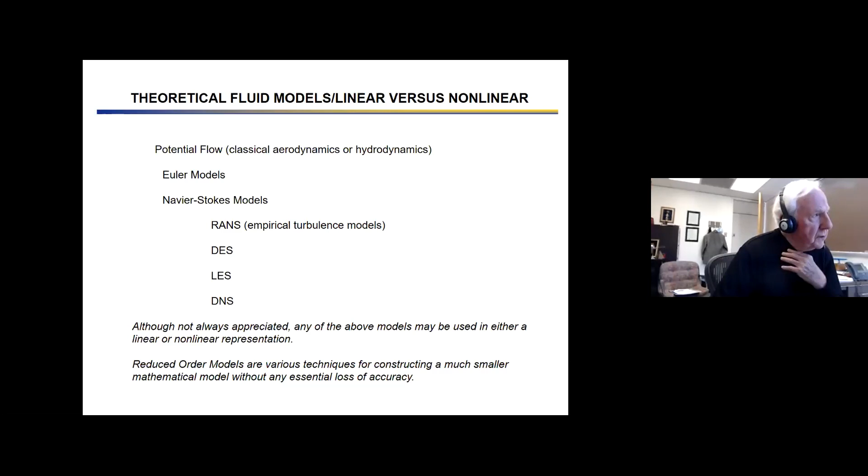As Jack McNamara knows and others here today, there's been a whole raft of people and efforts to construct so-called reduced order models, and that means different things to different people. But in my context, it means we're trying to take very large models of the fluid, large in terms of number of degrees of freedom, and break it down to something much smaller, but without losing any appreciable accuracy. That's easy to say, and hard to do, but some success has been achieved.

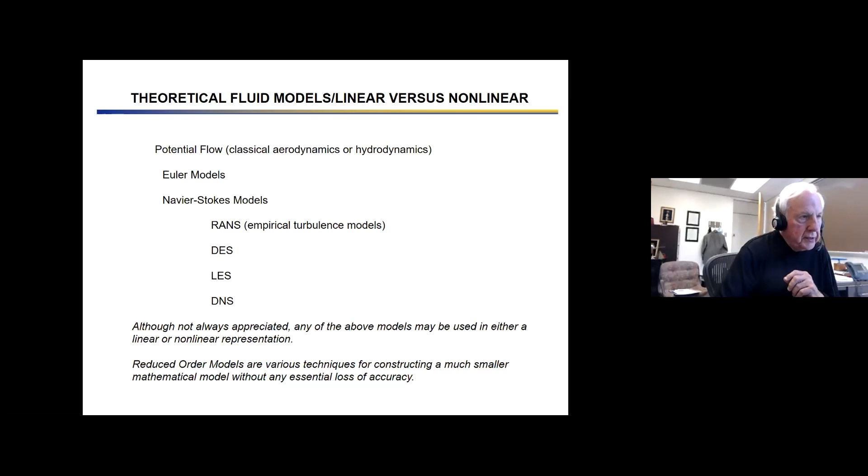With respect to the structural models, we're much further along in terms of constructing reduced order models. We know certainly how to do it for linear models because we simply need to find the eigenmodes. It turns out a modal representation works for structures as well, although I keep having people tell me, gee, can that really work? And the answer is yes, it can.

There are various nonlinearities that have been studied in the context of structures. Free play is something that's very important in practice and it's extensively studied in research as well. There are various geometric nonlinearities, and you can look at beams, plates, shells, and other elements as well, including dry friction dampers. The role of finite element models.

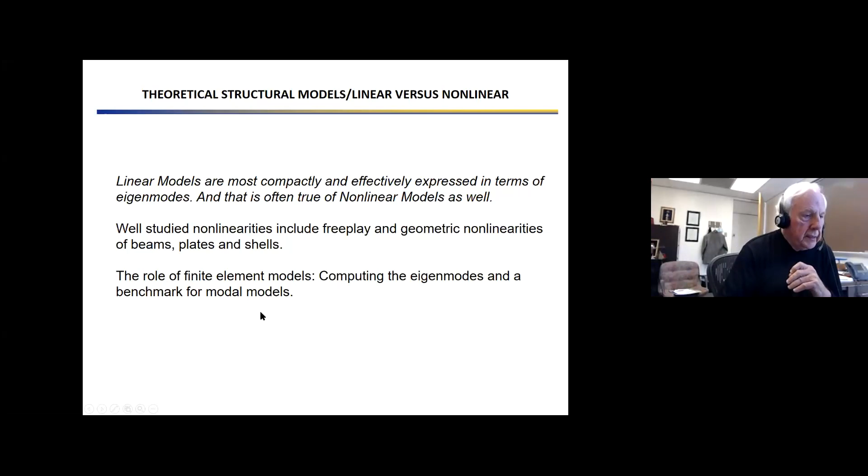This may be mildly controversial, but in our experience, we normally use the finite element models to first find the eigenmodes, and then we use a modal representation when we couple that with some fluid model. It can also serve as a benchmark in terms of assessing how accurately the modal model is.

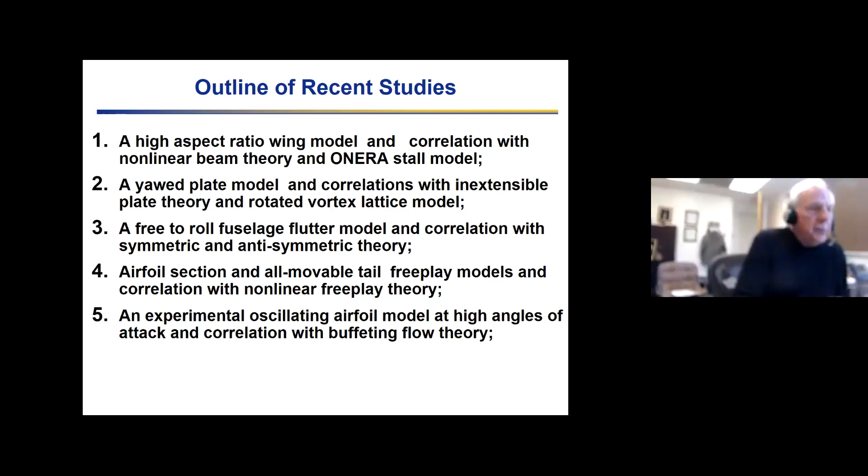This talk in some ways is a not so subtle advertisement for the next edition of our book, A Modern Course in Aeroelasticity. One new chapter is essentially a summary of some experiments we've done in fluid structure interaction over the last 10 or 20 years. The second part of the talk is a new chapter on hypersonic fluid structure interaction.

But this is the low speed part. We have a standard low speed tunnel at Duke, and we like to think we take this very ordinary tunnel and do, on occasion at least, some extraordinary things. So these are not a complete list, but it's 5 of the more interesting experiments we've done, and they're of current interest.

We're going to look at a high aspect ratio wing model. There's a whole workshop being planned for the next SciTech meeting in January of 2022, led by Jennifer Heeg at NASA, with substantial contributions from Daniella Raveh at the Technion, a group at Imperial College, and another group at DLR in Germany. They're basically building a very flexible high aspect ratio wing model and beginning their work on that. I'll tell you a little bit about the work that we've done on that.

A yawed plate model, we're going to use this as a context to look at both limit cycle oscillations of a wing, but also look at something that is sometimes called a flapping flag, which will at least touch briefly on the idea of energy harvesting.

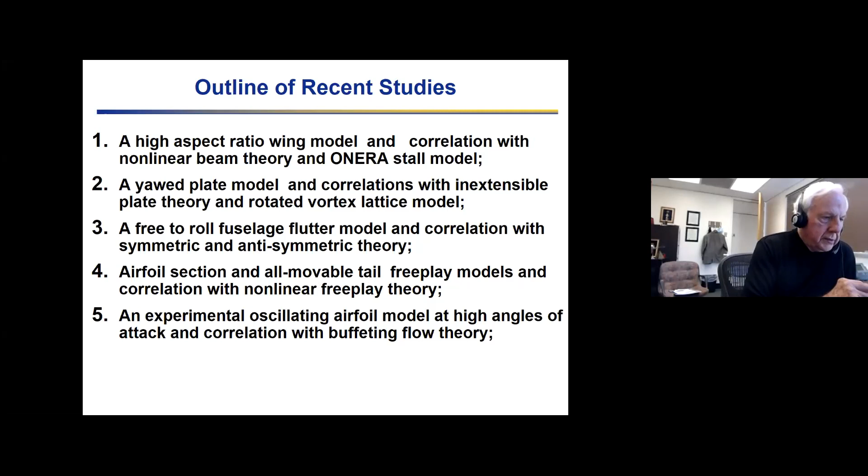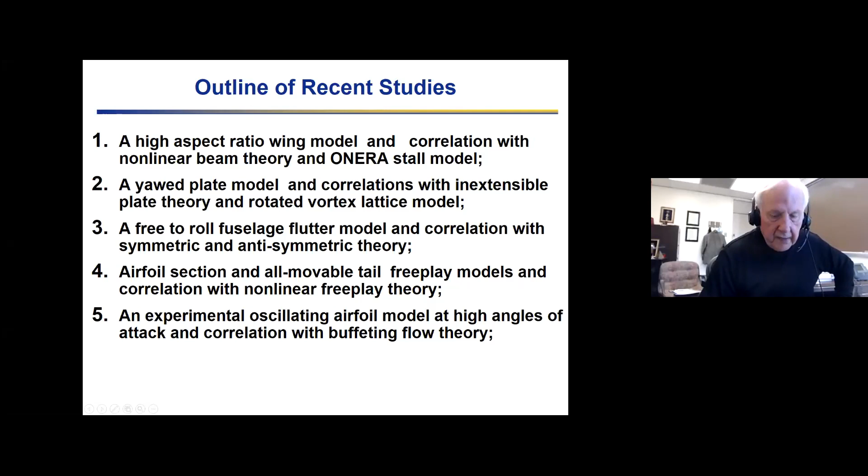And then we've been very interested in buffet, which in our context is a large scale instability of the fluid alone, but once the fluid begins to oscillate in a limit cycle, then it does interesting things if it's in the vicinity of a flexible structure. So those are the 5 items we're going to touch on in the first half of the talk.

So let's see what that is all about. In the second half of the talk, this is what we're doing currently.

We've been looking at limit cycle oscillations of cantilever structures. We tell people who ask us why, we say it's a control surface, but it's fascinating all by itself.

And then the last topic, the third topic there, is looking at clamped plates, which are typical of skin panels on high speed flight vehicles. We're working with a whole raft of people who are doing experiments, and we'll show a correlation with one of them.

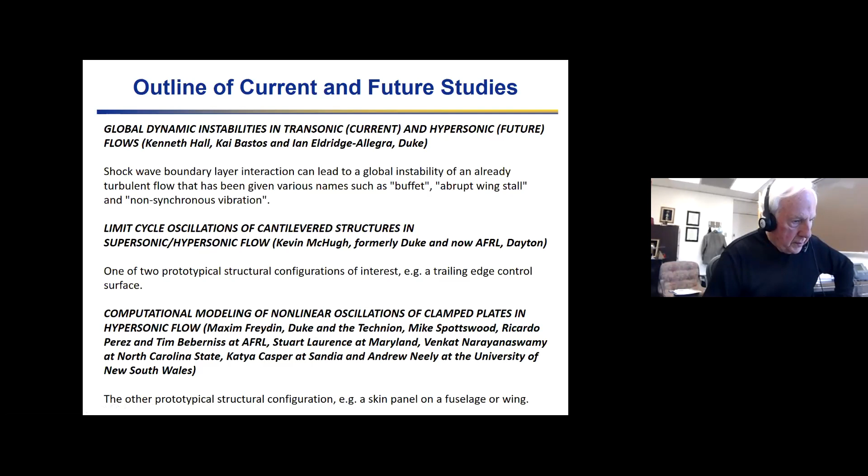So that's a preview of things to come. I'll start for the most part with pictures of experimental models, explain what that's all about, and then touch briefly on the corresponding theoretical computational model.

So let's see if I can get my pointer working here. Yeah, I can. So here's our high aspect ratio wing. This is very similar to what Daniella Raveh is doing in a Technion wind tunnel at the moment.

And it's cantilevered off the wall of our wind tunnel. It's a very flexible wing, high aspect ratio. The span is large compared to the chord. We have something on the end so we can adjust the mass properties to either create or suppress oscillations.

If you take the blue cover off, this is what it looks like inside. So structurally, it's just a simple beam. But the interesting thing about this is for these very high aspect ratio, very flexible structures, the bending normal to the beam, but the bending in the plane of the beam are both very important. We'll talk more about that in a moment. And then the twisting of the beam, of course, is important as well. So there are 3 global motions of interest. Let's see if I can get out of my pointer now.

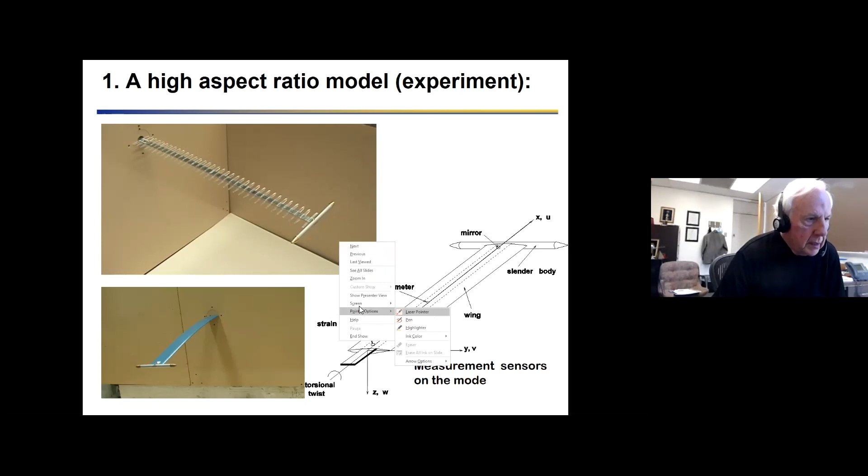So let's look at the video. On the left, we have the wing in 2 different views. On the left, we're going to start at a low speed, essentially 0, and go up to 33 or so meters per second, which will take us into the oscillation. And then on the right, we'll start at that higher flow velocity and decrease it.

We do this as an experiment because there's hysteresis in this model. And the hysteresis, we believe, is due to the separated flow and the stall aerodynamics. The dominant nonlinearity in terms of determining the amplitude of oscillation is actually in the structure, and I'll talk about that in just a moment. So we have both a structural nonlinearity and a fluid or aerodynamic nonlinearity in the picture.

There's hysteresis in the sense that when we go up in flow velocity, we reach a critical velocity where the oscillation starts, and it continues as we increase the flow velocity further. But then when we come down in flow velocity, that oscillation persists well below the velocity it started at when we were going up in flow velocity. So there's hysteresis. So let's start the video.

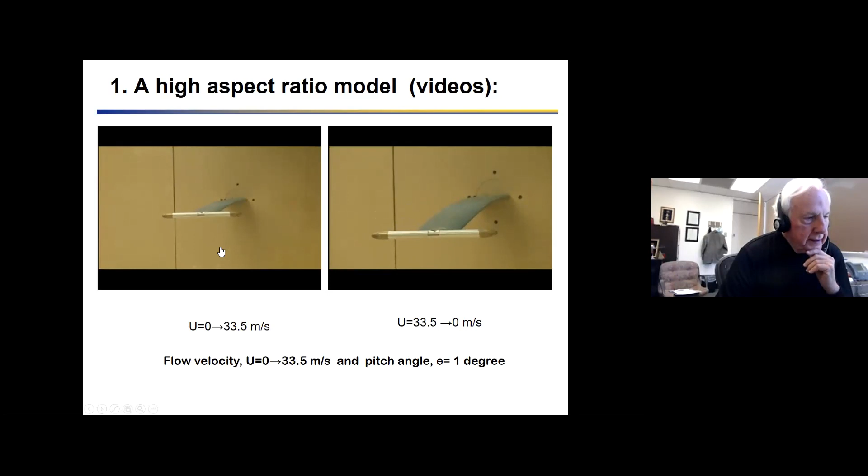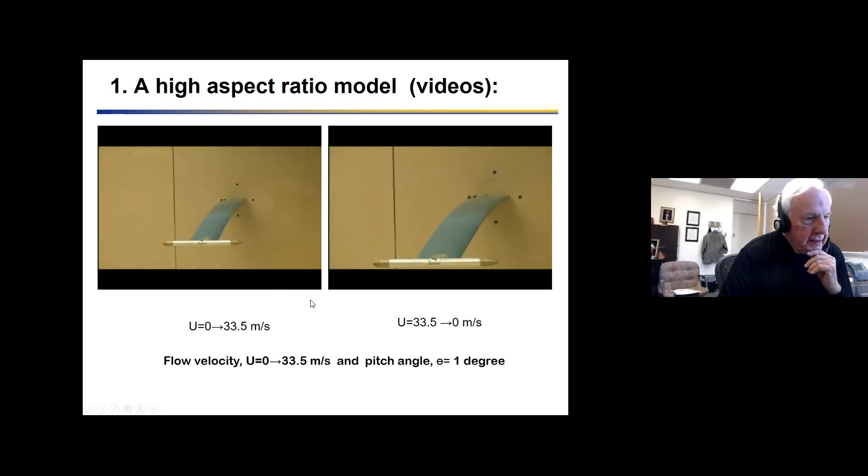And we'll start this one over here too, I hope. I didn't realize you were going to hear the wind tunnel. Well, I'm sorry about that. When I played it for myself, I didn't get the audio. Hope I didn't blow out your ears.

So here's the computational modeling simulation. And for those of you who are into this sort of thing, there are a number of structural modes that are participating, but principally it's twisting, as you see, and the second bending mode, which actually has a node line about 2/3 of the way along the span.

And then there's an in-plane deformation as well, but which is much smaller. However, the strain energy and the potential energy of that motion is comparable to the other motions, and therefore you do really need to have it in your model. So let me do this.

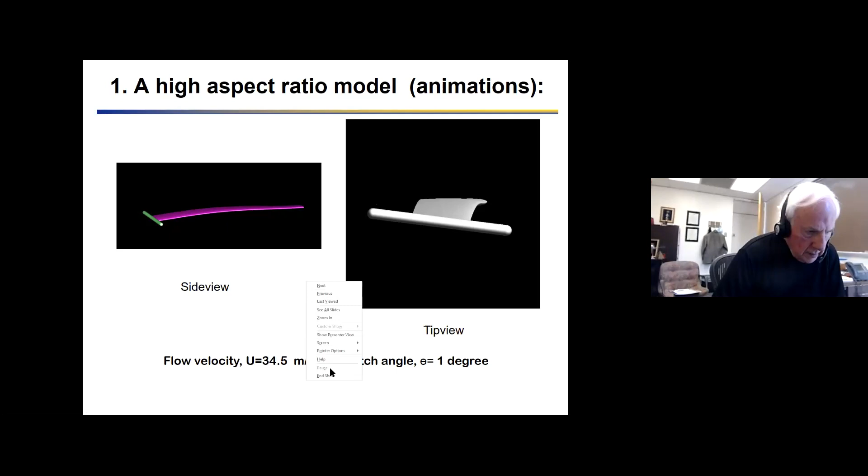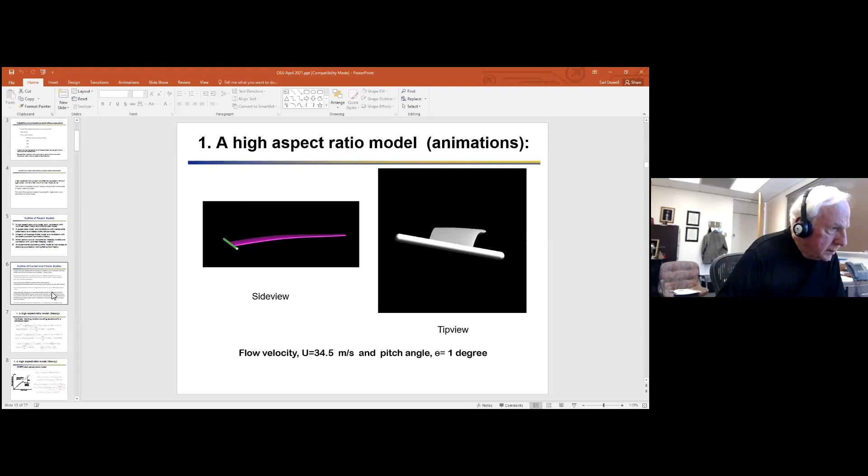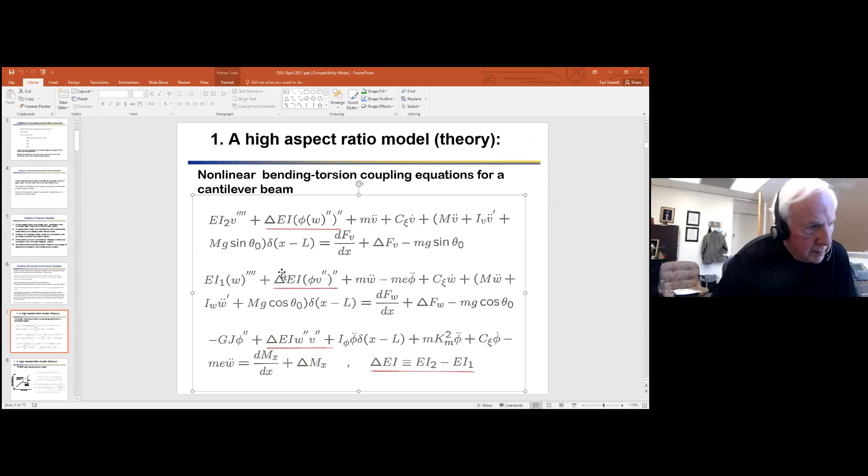Let me show you some equations, and I won't go into this in detail, but I want to highlight something for you. V is the displacement in the chordwise direction. W is the displacement normal to the wing, and phi is the twisting.

And the underlined terms are the dominant nonlinearities in the system. Note that in the chordwise motion equation, it's the twisting and the other bending deflection that appear. And conversely, in this equation, which is the principal equation for the flapwise or transverse deflection, it's the twisting and the chordwise deflection that appears.

And then in the twist equation, it's a product of W times V, and the primes denote derivative with respect to distance along the span. So these are really curvatures. And the intensity of the nonlinearity is the difference, delta EI, the difference in the bending stiffness in one direction versus the other direction.

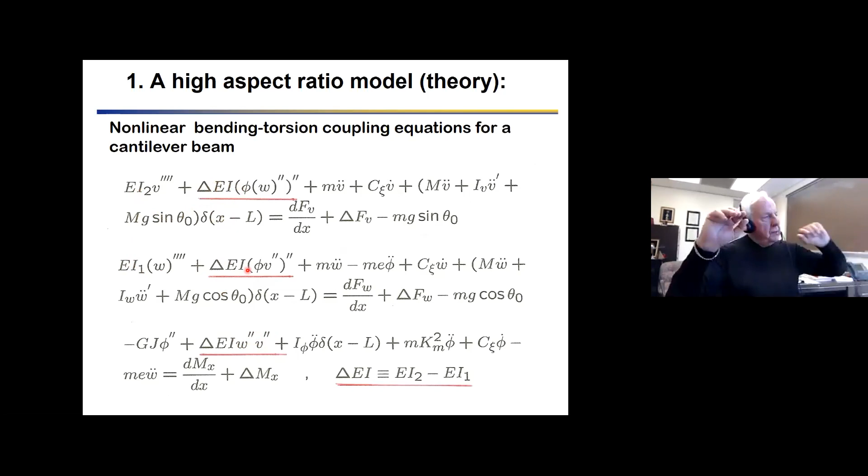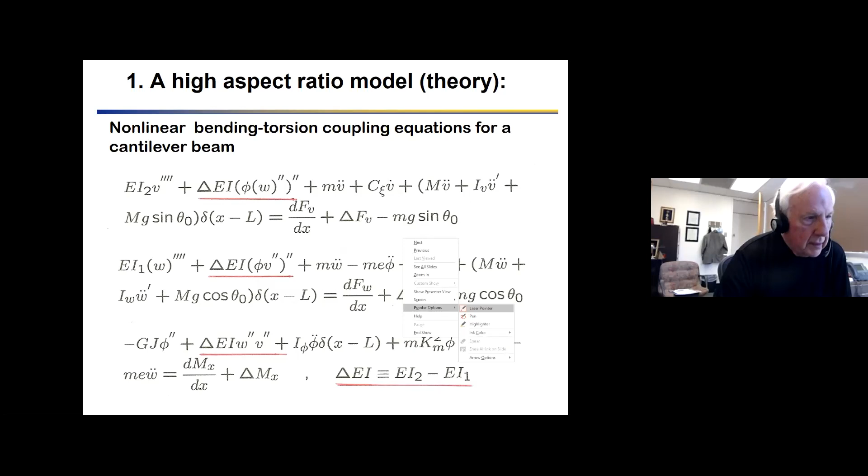This whole model was developed years ago for rotorcraft, because if you think of a rotor blade in a helicopter, it's a very high aspect ratio wing which happens to rotate. Now that high aspect ratio wings in fixed wing airplanes are back in vogue, we're using this same model again. And when I say we, I'm talking about the community. Okay, let's move on.

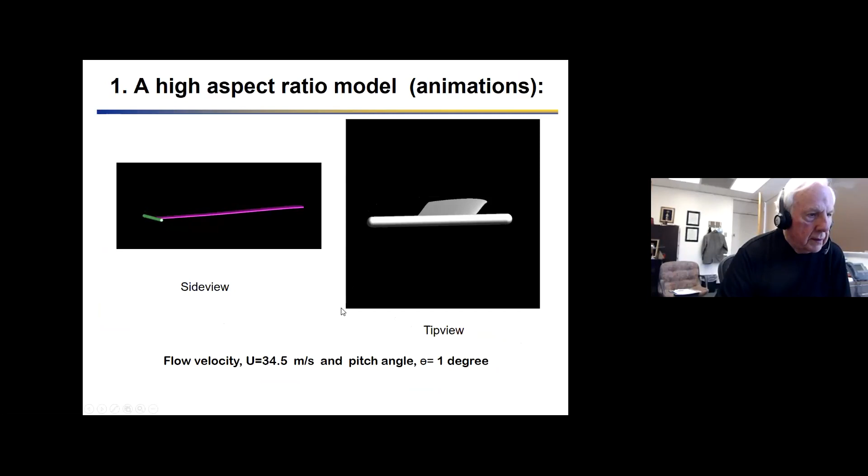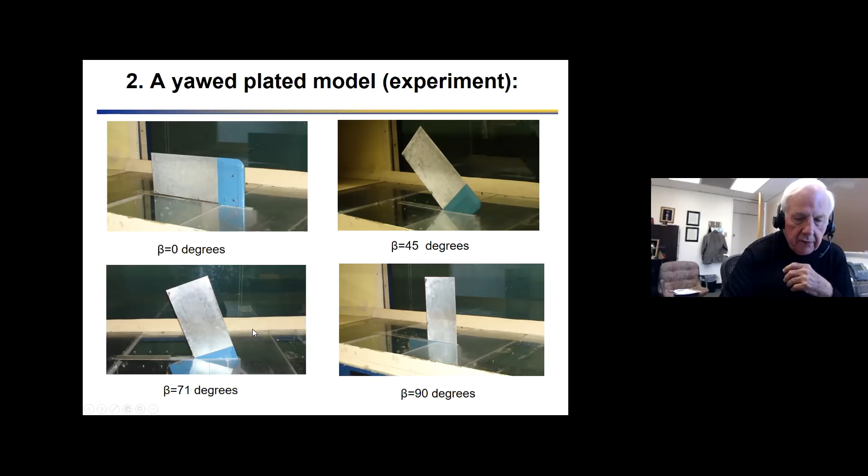This one, the beta equals 0, or the flag configuration, is the one that has the largest amplitude motion, as you'll see. So we call that the energy harvesting configuration. And you can observe wing LCO as well, although people have not always appreciated that, but we can see that when we look at the video. Oh, let me pause here.

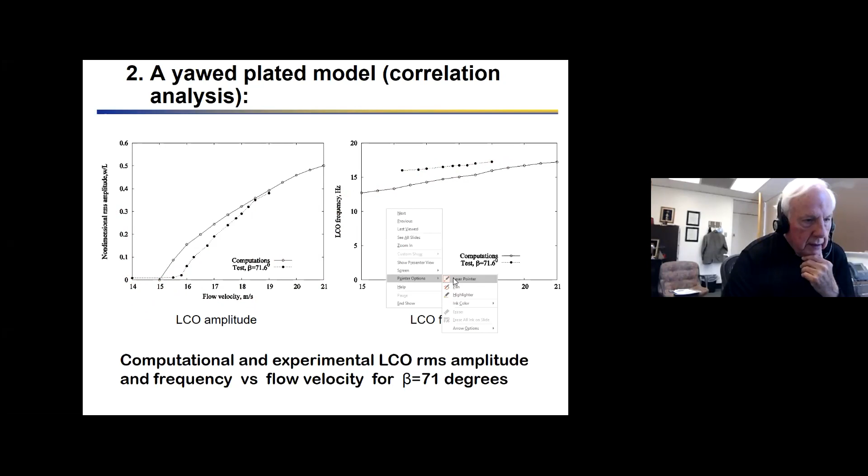And now you can see for several values of beta, the wing, the yaw wing if you like, and the flag. You can see how they go.

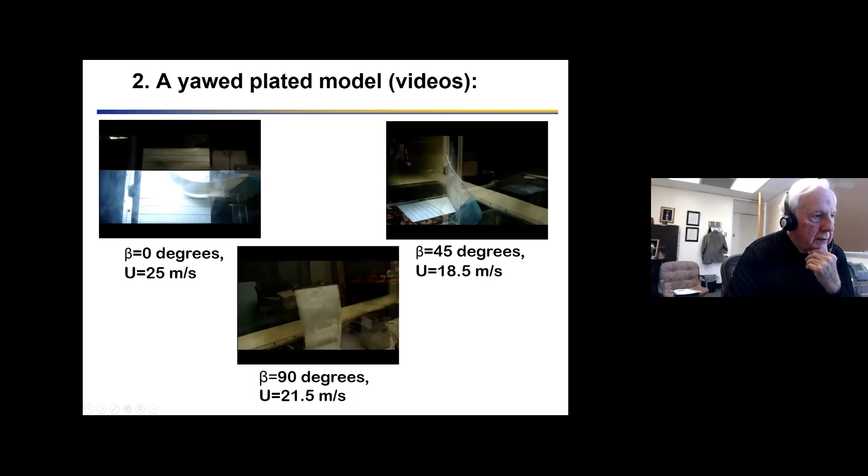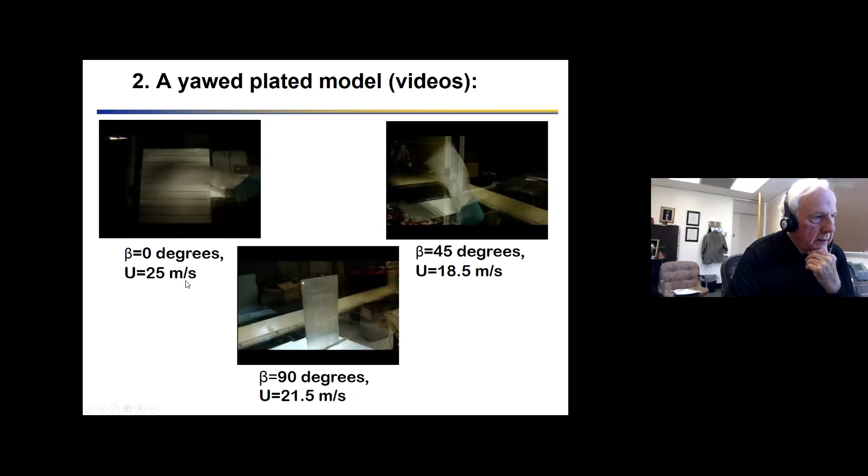I'm still not sure why you're getting the audio and I didn't, but I hope that doesn't destroy your hearing.

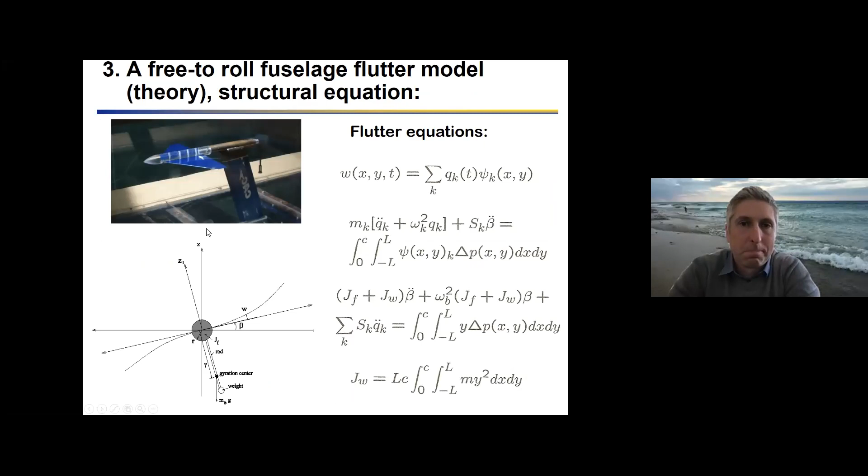The free to roll model was motivated by the F-16. It turns out that if you have something that looks like a fuselage up in the left-hand corner with the wing, that's the blue object, and if this pencil fuselage-like structure is free to roll, then in fact this is more likely to flutter in an anti-symmetric mode than a symmetric mode. And we found that fascinating, as other people have. So we thought we'd build a small model to show that.

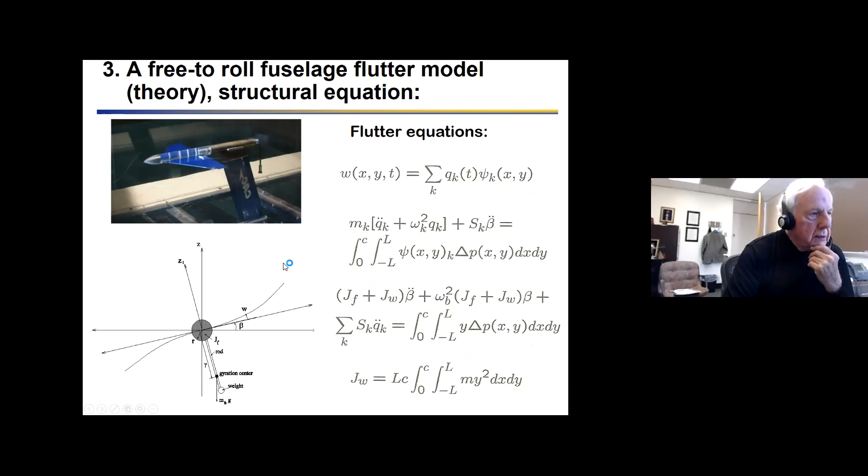And here it is in a different view. We correlated theory and experiment, which agrees fairly well. But again, let's look at the video.

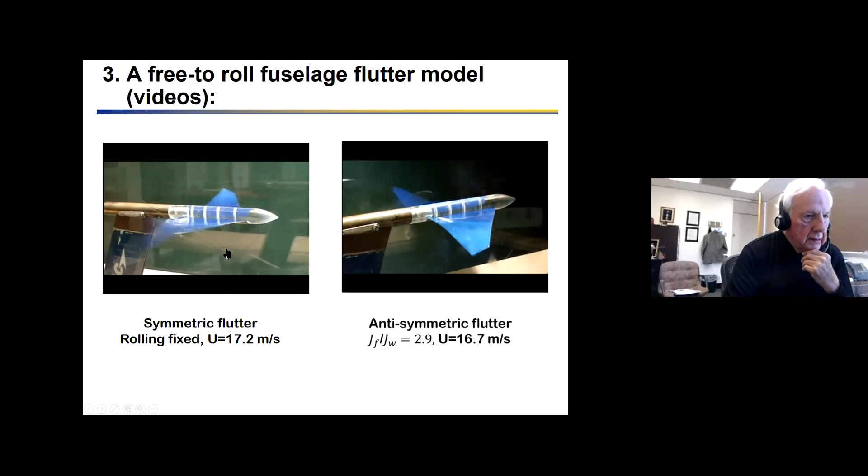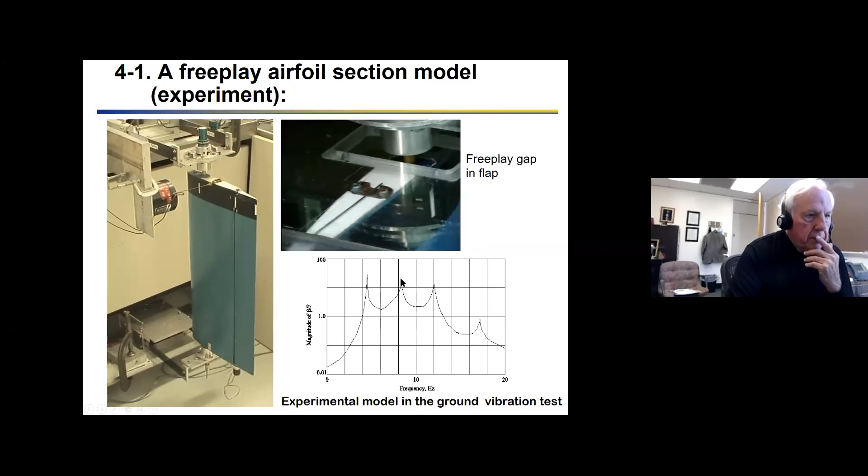You can play with all sorts of parameters. You can suppress this oscillation by putting the wing at an angle of attack. In fact, sometimes practitioners say we shouldn't worry about that, because wings are almost always at non-zero angle of attack. And if angle of attack is large compared to the free play range, you can show theoretically and experimentally that this goes away. But then you have vertical tails with control surfaces as well, which is my counter argument to why we should still be looking at this.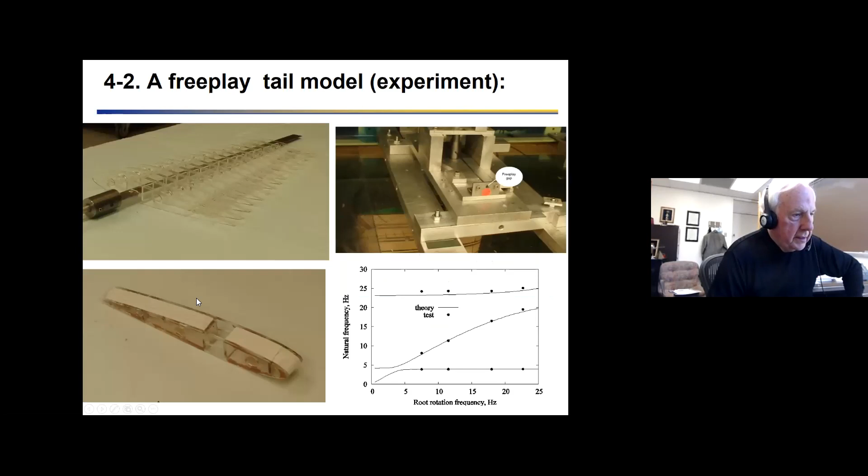If you can, well, you can. I didn't realize I was going to have to speak over a wind tunnel.

But if you were closely looking at the motion on your left, you saw that the main wing was moving back and forth a great deal. Whereas in this case, in this limit cycle, the main wing moves hardly at all and it's all the control surface.

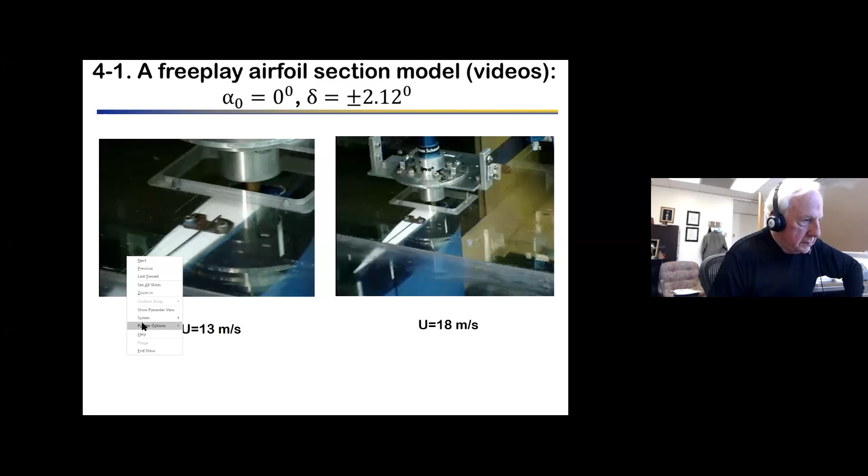By the way, if you... the range at, let me go back one more.

Yeah, the range over which we do our testing, it goes up to about 25 meters per second, and we stop there because the linear flutter speed, if there's no free play, is predicted to be at about 27 meters per second. So we didn't want to break our model, and that's why we stopped.

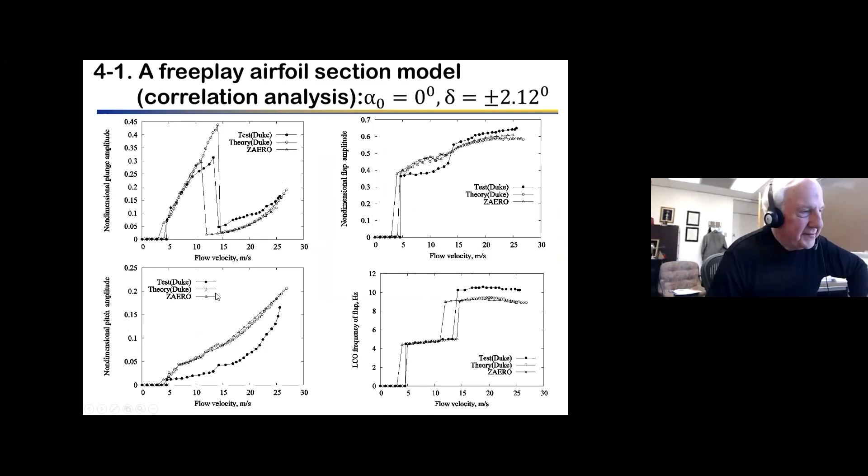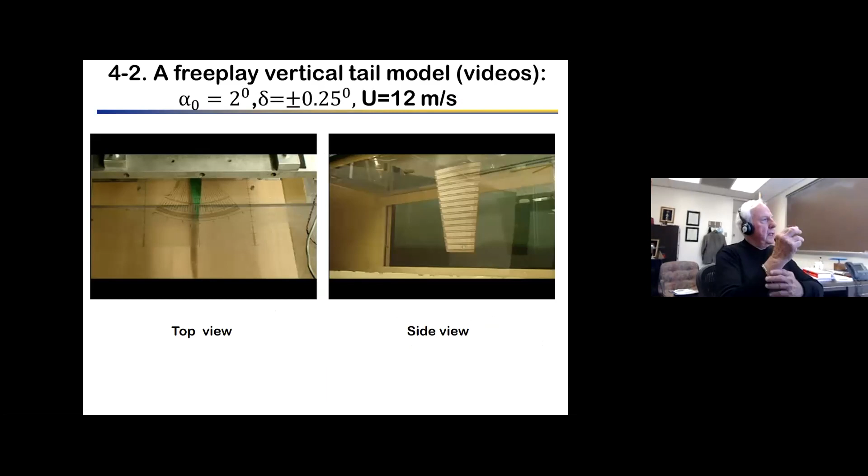I mentioned before that we actually constructed another free play model, which mimicked what the Air Force had done many years ago. In this case, the free play is at the root of this model, which is mounted vertically in our wind tunnel. That takes gravity out of the picture, of course. But we also wanted to look at what happens when we mount it horizontally. Let me show you briefly what happens here.

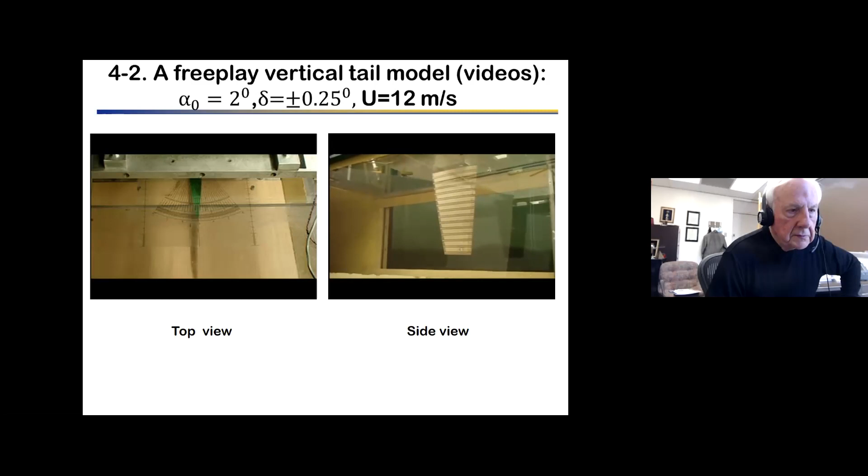That's a nice simple motion. But now if we look at it mounted horizontally, we have gravity in the picture. Gravity provides a static load, which induces, as it turns out, another nonlinearity in the system. So we have two competing nonlinearities.

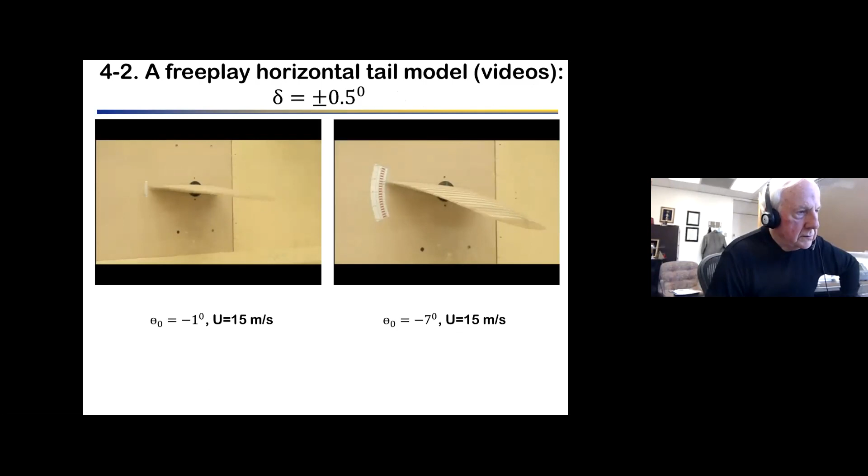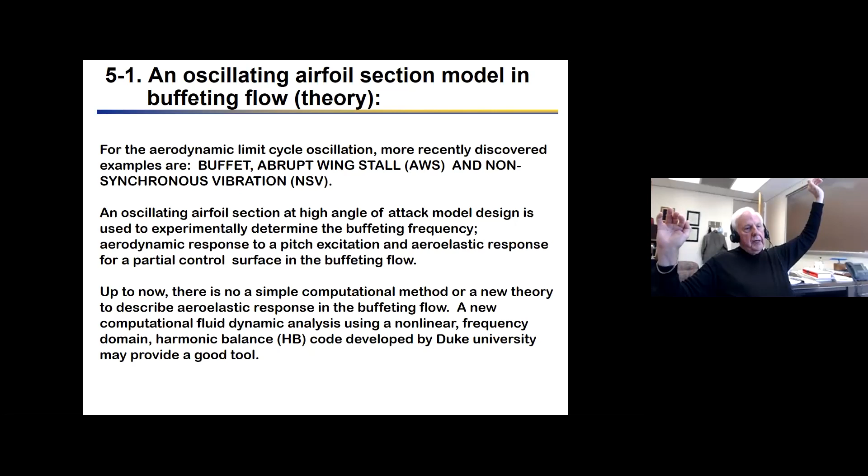And now if you look at the motion, so there you actually have a chaotic oscillation, which is typical in our experience when you have at least two different nonlinear mechanisms competing for attention.

The last thing I'll talk about in terms of this low speed array of experiments is an oscillating airfoil section in buffeting flow. Various people use different names to describe this. We're talking about a large scale fluid instability. So we already have a turbulent flow, for example, but now in certain Mach number angle of attack ranges in particular, we can have another global instability. We can bifurcate yet again, if you will.

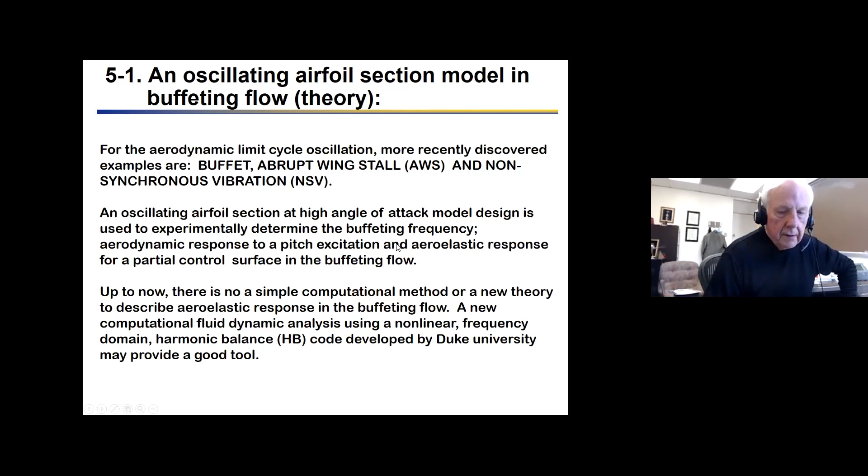In the airframe industry, this is usually called buffet. Sometimes abrupt wing stall if a rigid body mode is involved. And the turbomachinery people tend to call it non-synchronous vibration. But whatever you call it, it's a large scale fluid instability. And here's our model again.

Here's our airfoil, but if we rip off the cover, you can see various pressure taps. Over on the left-hand side, you can see where the pressure taps are mounted on the upper and lower surface, because we want to measure the flow oscillations.

In the initial experiment, the airfoil itself doesn't move, but the fluid is beating its heart out. Fundamentally, this is similar to the von Karman vortex street behind a bluff body such as a cylinder in transverse flow. There again is a characteristic Strouhal number associated with the flow oscillation.

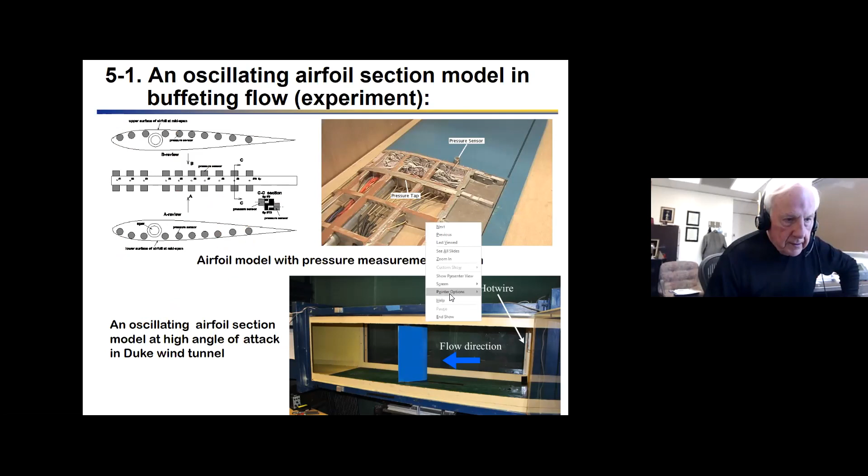So let's see how this works. If you simply place this airfoil at any one of several angles of attack from 30 to 60 degrees, it has to be fairly high at low Mach numbers. It can be 3-4 degrees in transonic flow for the same basic physical phenomena. And you plot the buffeting frequency versus airspeed, or versus Reynolds number, which is the same in this case. It's the usual linear variation.

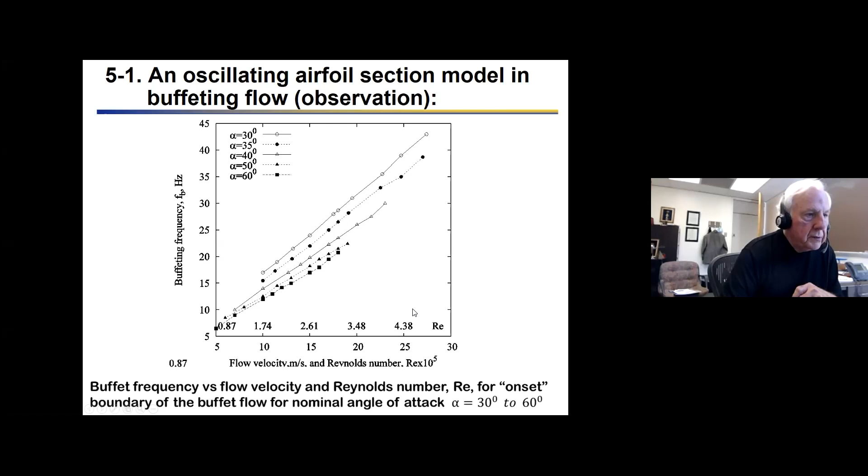And then if you scale everything non-dimensionally using the chord times the sine of the angle of attack, you can take all this data and make it into a single curve. So there is a Strouhal number.

The next thing you can do is start oscillating that airfoil at a given frequency. Now there are two competing frequencies: one is the frequency of the airfoil oscillation, and the other is the inherent frequency of the flow oscillation, even when the airfoil is not moving.

Then you plot the amplitude of the airfoil motion versus the non-dimensional frequency ratio of the fluid to structural frequency, or vice versa. If that frequency ratio is sufficiently removed from one, either below or above, then you have two frequencies that you see in the flow: the inherent flow frequency plus the frequency of the airfoil motion, which is forcing the fluid at that frequency.

But if you're in a V-shaped area denoted by the green lines and the green data points, both the flow and the structure, which is moving at a prescribed frequency, lock onto the structural frequency - they have the prescribed motion frequency of the airfoil. This is called lock-in. And if you place this airfoil on an elastic spring with a resonant frequency in the same vicinity, you get very large motions of the structure, which is of practical interest.

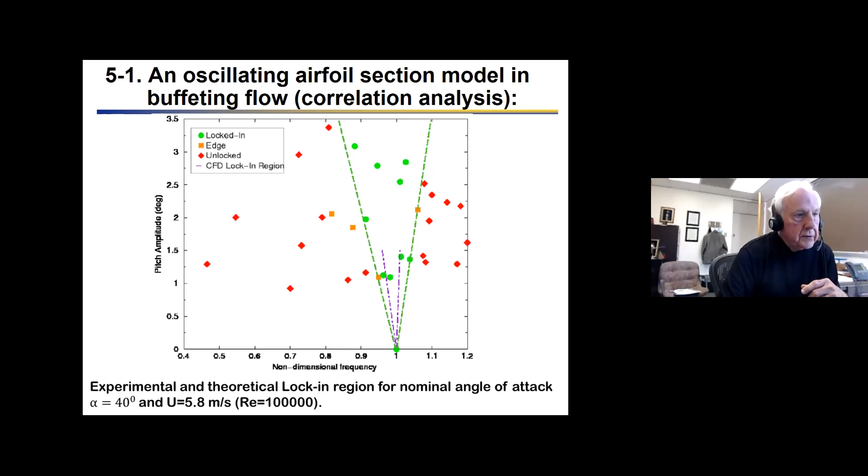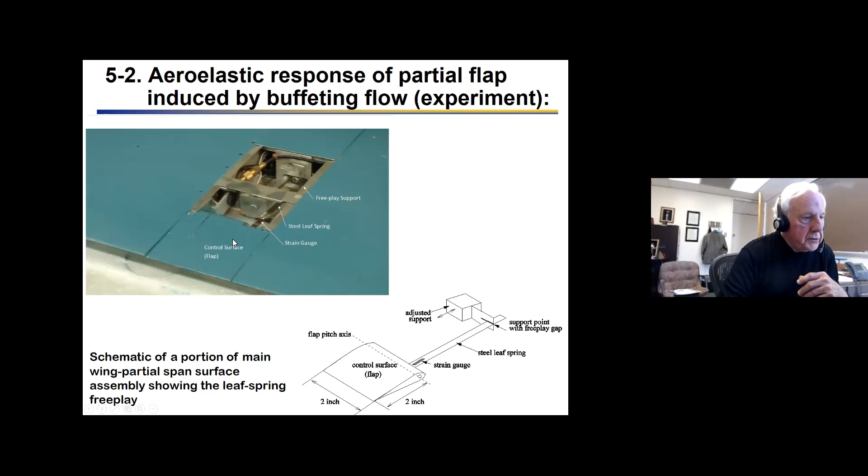I won't bother to show this video, but it shows the airfoil oscillating and doing its thing. But I will point out that we also put a control surface on it, shown in the picture, a flap. And we took some data.

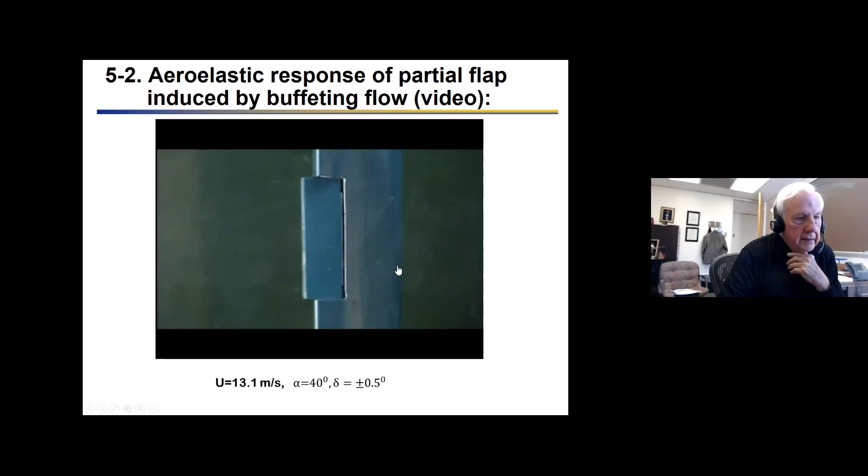Again, the flap frequency is now no longer a single frequency, it's broadband, it's chaotic, because again we have two nonlinear mechanisms: the inherent nonlinear limit cycle of the flow interacting with the structural free play mechanism, which we put into that control surface.

So now we're going to leap right through transonic flow and go into hypersonics. Actually, a fair amount of our current work is on transonics, but I had to make a choice, so we decided to go hypersonic for the last little bit.

So let's go hypersonic. All of this work I've described has been done by a small army of people, and you'll see their names at the end. But this particular work, which was recently presented at the JANNAF meeting, is largely that of Maxim Freydin with a little help from his colleague.

So we're going to look at a computational model which will be used to correlate with an Air Force Research Lab experiment led by Mike Spottswood and his team. There's a lot in this model because there's a lot going on physically in the experiment.

You have to model the aerodynamics, hence aero. You have to model the thermal field, hence thermal. It turns out there's an acoustic cavity beneath the structure, so we have to model that. And then the elastic part is the elastic structure itself. We're going to put all that together at some level of modeling and hope for the best. And it turns out we did have some success.

And then, oops, need to get out of this.

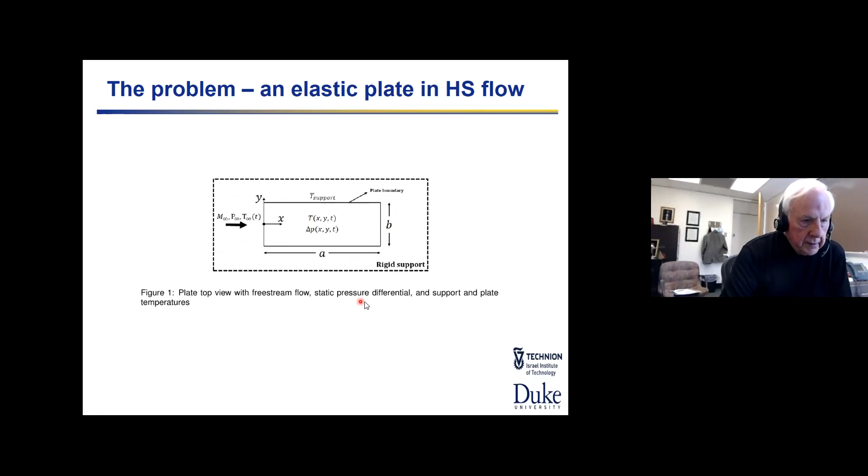And then if you look at the side view, here's just a cartoon showing the deformation of the structure. This dotted line indicates there's a cavity, an enclosed volume beneath the plate, and it has its own resonant acoustic frequencies, and sometimes those appear significantly in the total system response. Not always, but they can, particularly if the cavity is relatively shallow, which it often is for practical reasons.

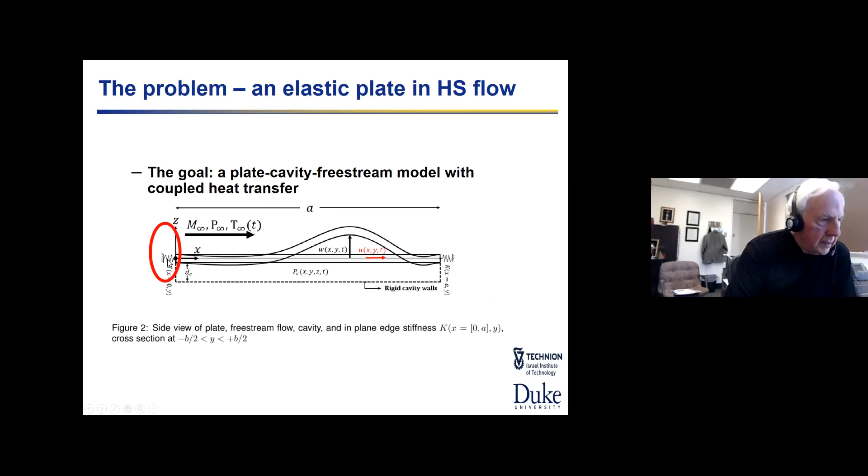And then I'm going to highlight over here on the left a spring, which represents the support flexibility that holds this panel. So the panel is flexible, but what's not always appreciated is the supports are too. They tend to be very rigid with respect to transverse motions, that is motions in the W direction. But if you look at the in-plane motions in the U direction,

those are not held rigidly at the supports typically. In fact, it turns out the bending, even of what appears to be initially a massive support, the bending stiffness of the massive support is comparable to the in-plane stiffness of these thin panels, at least in our experience. And we've done some separate experiments directly to verify that.

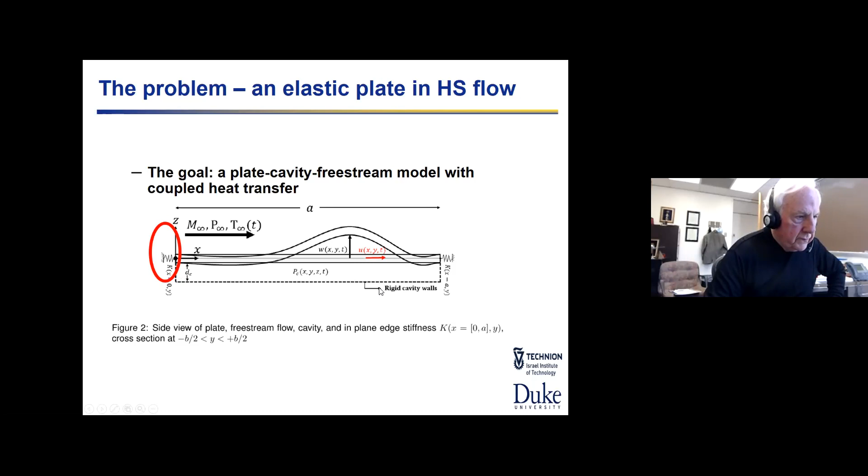So this mini presentation of this work, we're going to show you some equations of motion. We'll look at the heat equation in particular and say some things about that. We'll talk a bit about the experiment, and then we'll show some results which highlight the sensitivity of the results to in-plane edge stiffness.

We'll talk about how we model the heat flux and make an approximation, which has what we think is an acceptable error on the order of 5%. And then we're also going to not only model the structure in terms of its modes, we'll model the temperature field in terms of modes of that field as well.

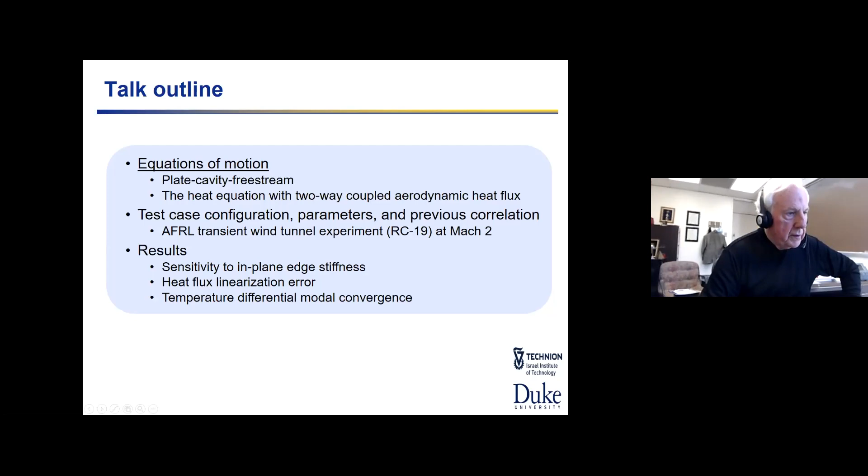We'll not derive these equations. This is to give you a sense of what they look like if you've never seen them before. And if you're someone like Jack McNamara who has seen them before or something like this, this is just to remind you of what we have in our particular model. So

Here's the plate equation of motion. Here's the equation of motion with the cavity, and here's the heat equation. So W sub K is the kth mode amplitude for the structure. And so we have a mass, generalized mass, generalized damping, generalized stiffness, the usual linear terms. But now there's a nonlinear plate stiffness associated with the fact that when the plate bends, it also wants to stretch in plane. That gives a cubic stiffness.

This is all coupled to the thermal field. It's coupled to the external aerodynamic flow, which we initially used piston theory. It's coupled to the pressure in the cavity. So P sub K is a pressure modal coefficient. And then there's a static pressure differential across the plate as well.

So linear plate model, nonlinear stiffness stretching due to bending, coupling to the thermal field, coupling to the external flow, coupling to the cavity aerodynamics or acoustics, and then the static pressure differential.

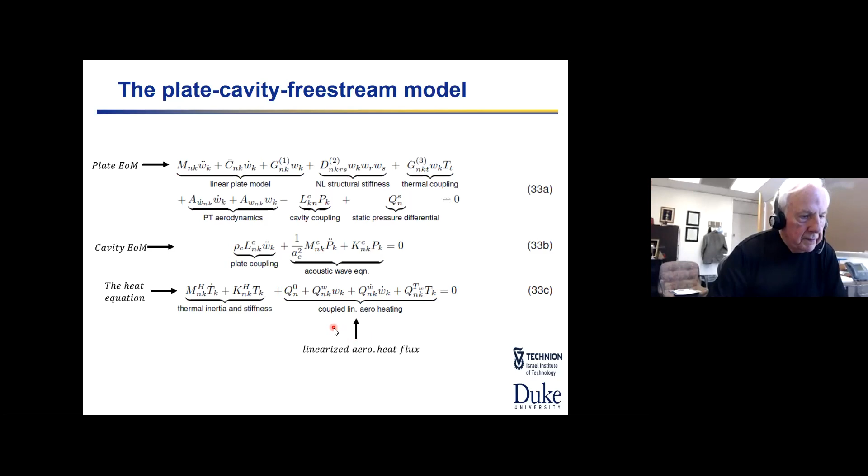Okay, so that's basically what we're doing in terms of modeling. And again, those are terms that require a little more explanation as we go along.

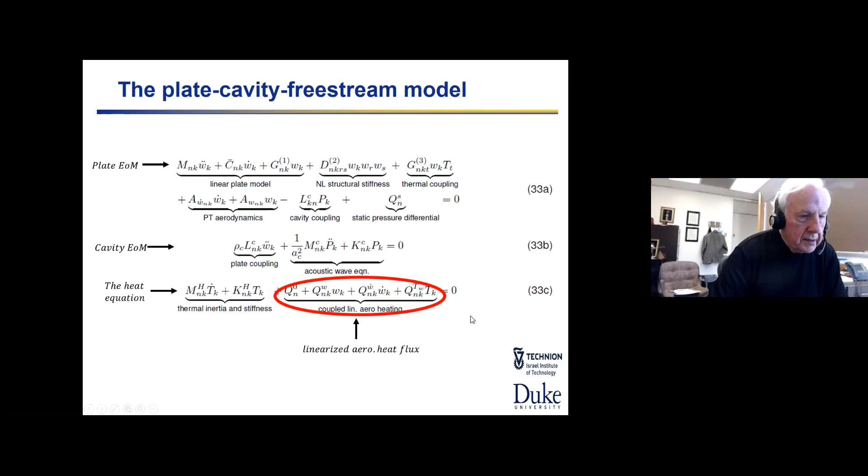Don't want to go into this in too much detail today, but we're going to take the heat flux - this is not dynamic pressure for those of you who know that terminology, this is the heat flux due to the aerodynamic flow - and we're going to represent it in terms of basically a Taylor series, which is in proportion to what aerodynamicists call the downwash, basically representing the motion of the structure as it influences the external flow, and also linear in terms of the wall temperature. The reason we like this is because this simplifies a modal representation of the thermal field.

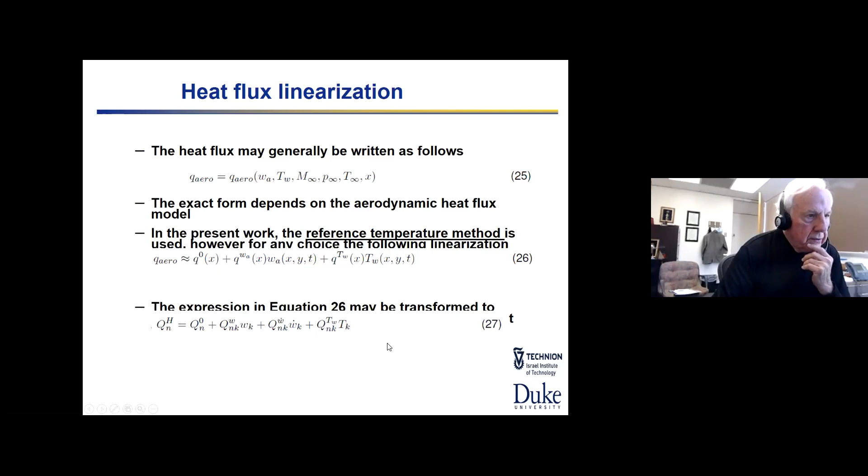So now let's talk a little bit about the test case that Mike Spottswood and team did. This is taken from one of their papers.

Here's the back side of the elastic panel. It's mounted in a frame, and this frame is relatively massive, but our claim is we think it's still fairly flexible with respect to in-plane restraint, but not, of course, out of plane.

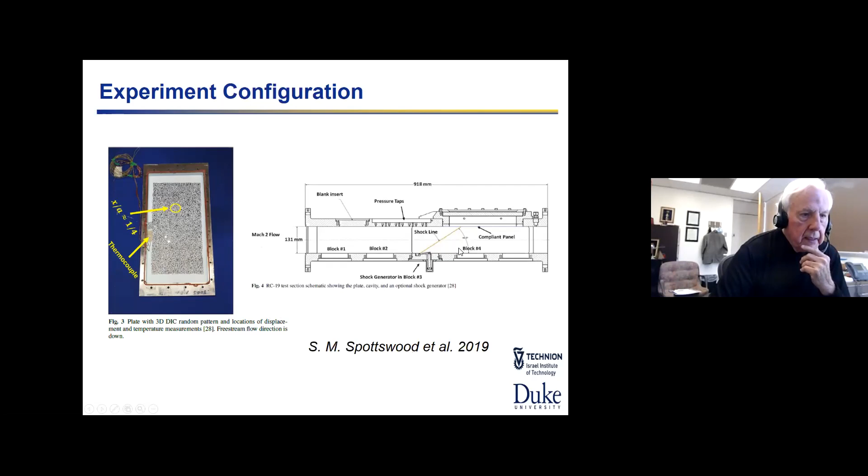Here's their wind tunnel cross section, and in general, they have a shock, and we're doing the case in this situation where the shock is ahead of the panel, so we don't have to worry about the complexity of having the shock on the panel. Okay, and here's just another view, so I won't dwell on that.

And the importance of the temperature differential is that's going to buckle the plate at some point. And then as the delta T goes on, and we reach a temperature equilibrium between the support structure and the elastic plate, the plate will stop fluttering due to the fact that it's highly buckled.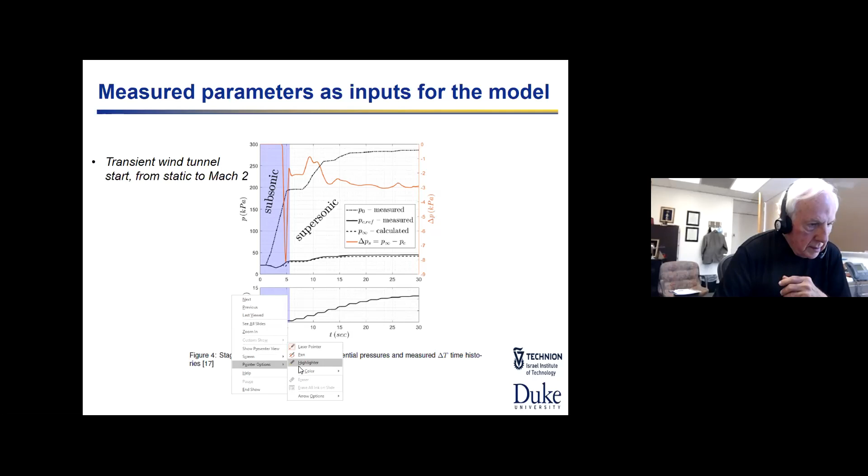So let's go on. Okay, so this is the initial computation we did, and we got the right answer for the wrong reason. We made two mistakes, and when you make two mistakes, it's always great if they compensate each other. So when we did this computation, we took a measured temperature on the plate from Mike's experiment, from the AFRL experiment, which was fairly near the edge of the plate.

And we assumed, as it turned out, that the temperature on the plate was the same everywhere else, which is not true. We also assumed that the in-plane plate stiffness of the support was very high, which is also not true. But nevertheless, we got what we think is pretty good correlation.

And then initially, the temperature differential makes the plate less stiff. And so we go into a flutter oscillation and a limit cycle oscillation. And then the temperature differential gets higher and higher, and the plate, once it's buckled, becomes stiff again.

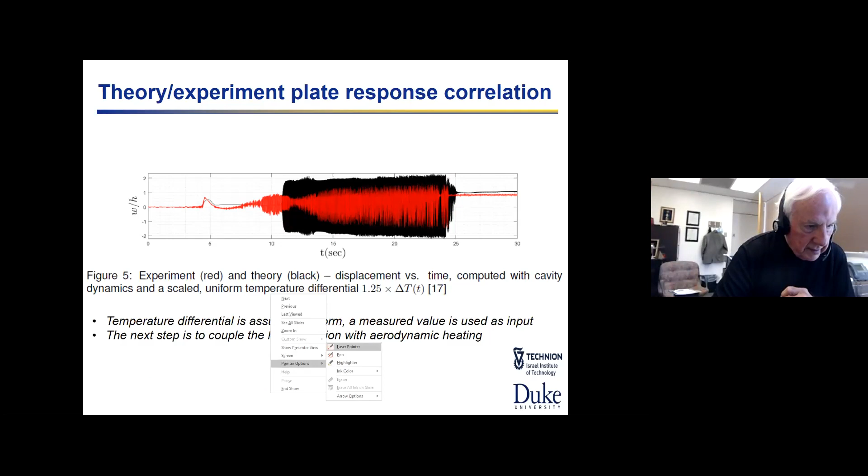Okay. No, I won't take time to tell you that story.

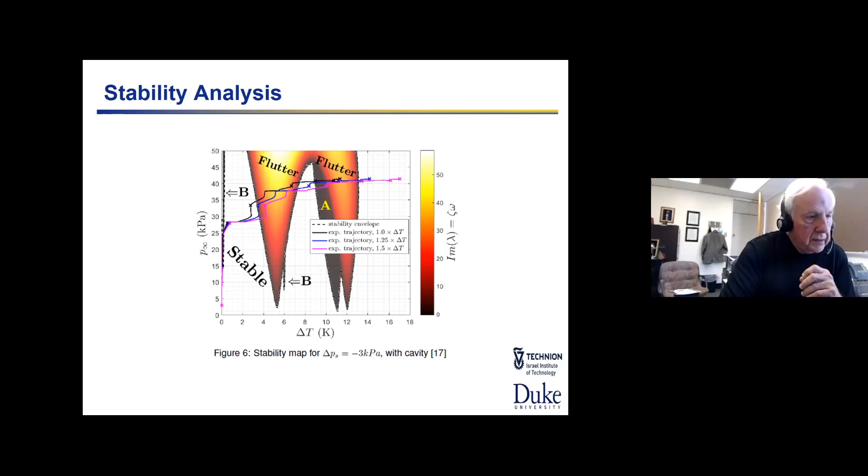And I think that's probably because this is, if you will, a snapshot in time that we're doing the computation, whereas the experiment just keeps going, and we probably go through the stable region so quickly that the panel doesn't restabilize. At least that's our current thinking.

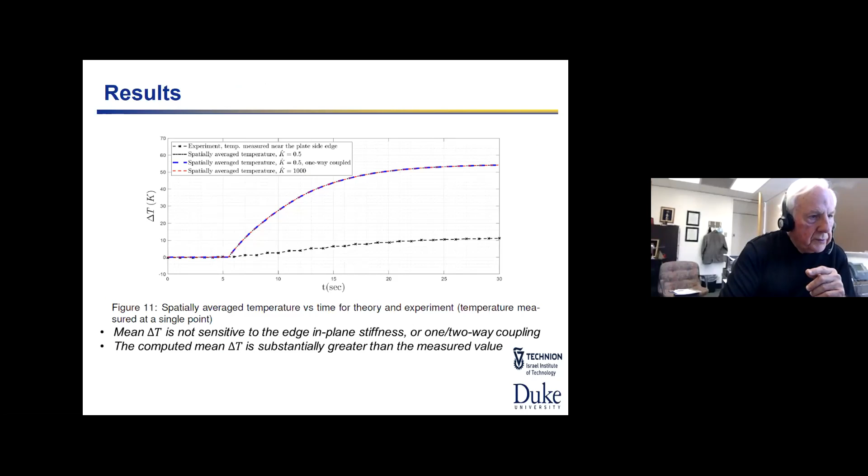Okay, now let me show you what happens when we think about this a little bit more. K is a parameter which is essentially the ratio of the in-plane stiffness of the plate to the bending stiffness of the support. And it can vary anywhere from 0 to infinity, depending on whether you have no stiffness in the in-plane support to completely rigid in-plane as well as out of plane.

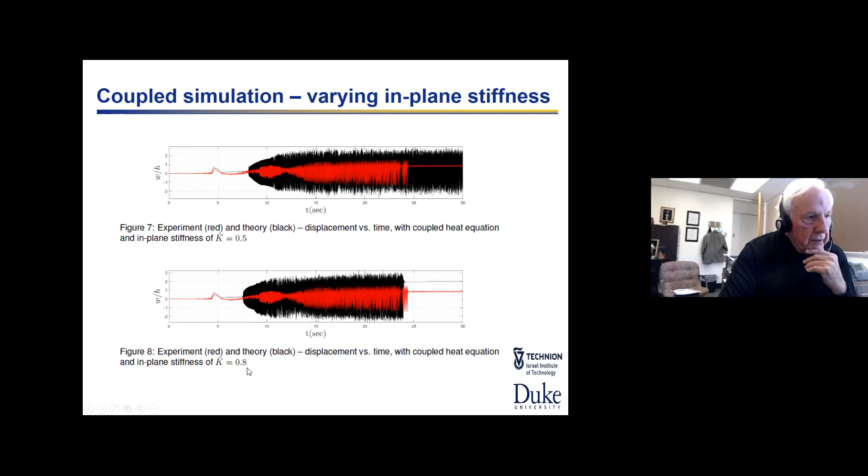And the results are quite sensitive to this parameter. So if this parameter is 0.5, you see that the experiment is always in red, but the computation is in black. So if this parameter is low, then the response in the theory computation is larger, and it gets smaller as we continue to increase the K value, as in the second lower picture.

And then if we increase the K value even more, the region over which we see flutter in the computation diminishes. And then if we make it very rigid in plane, as in the bottom picture, effectively the LCO goes away. So what was happening?

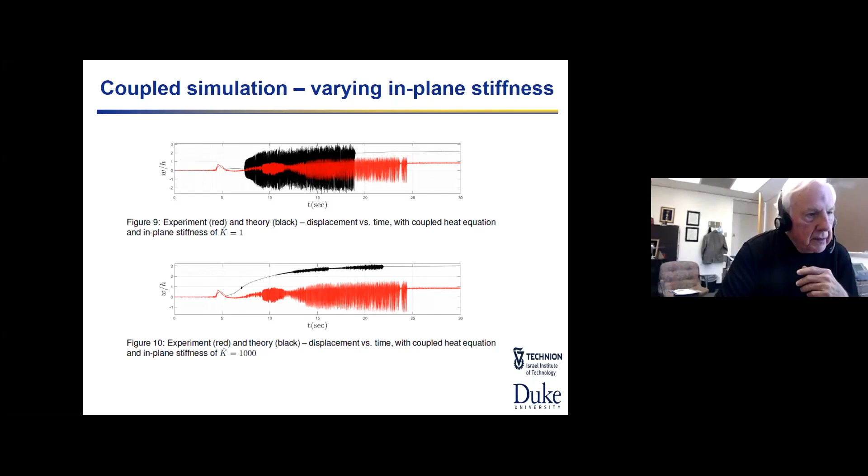We didn't like this because basically we knew that the K parameter we thought should be nearer 1 than 1,000. So we started looking at the temperature field, and our model does predict the temperature field.

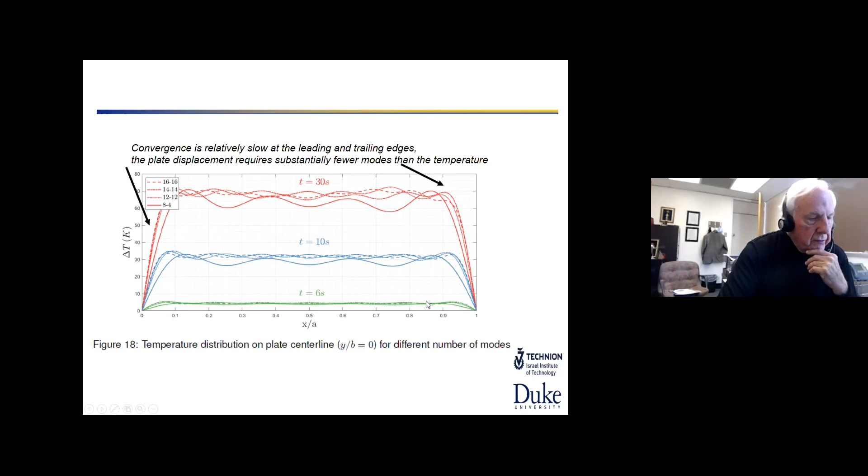But the thermocouple that was used to measure the temperature field was fairly near the edge. So our current thinking is that the temperature differential was really probably larger than was measured by the thermocouple near the edge. But we're hoping, and I think Mike plans to do this, we're hoping to get a full field temperature measurement to see if our hypothesis is really right.

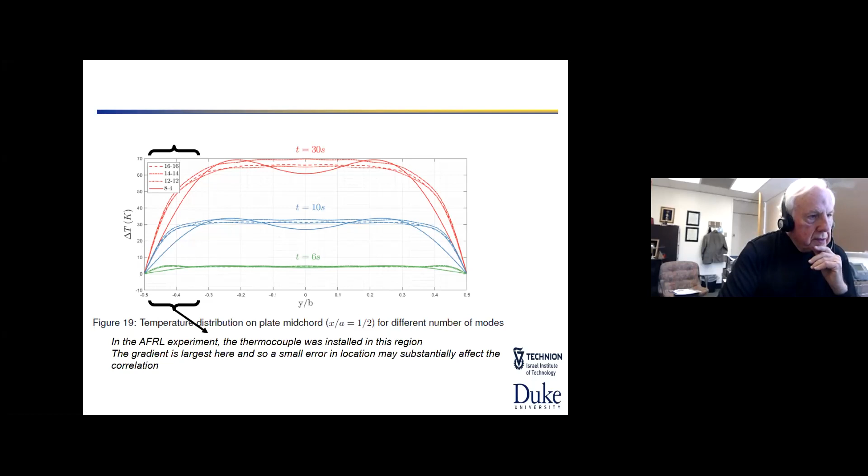So anyway, here's our conclusions. We have this model, that's good. We simplified it in a way I didn't go into a lot of detail, but it's important in terms of doing these computations efficiently. The error incurred, we think, is quite modest.

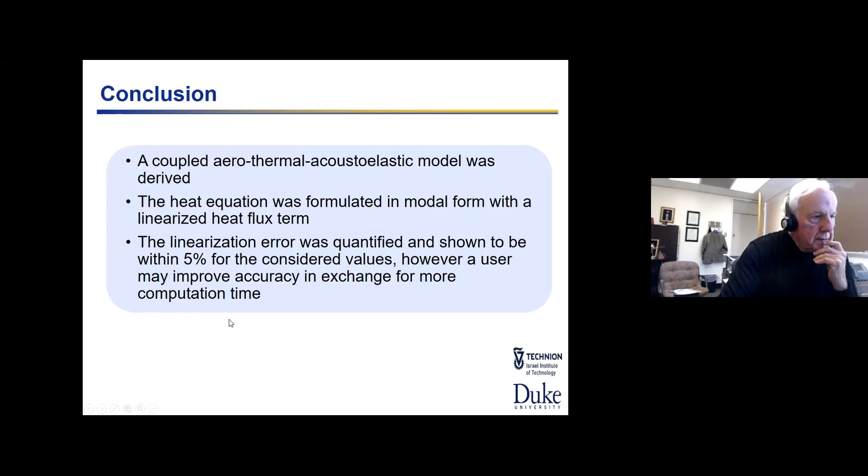The dynamic response of the plate is very sensitive to the assumption made about the in-plane boundary stiffness. So that's something you should measure, we should measure ahead of time. And there are ways to do that. And that has been done for other models.

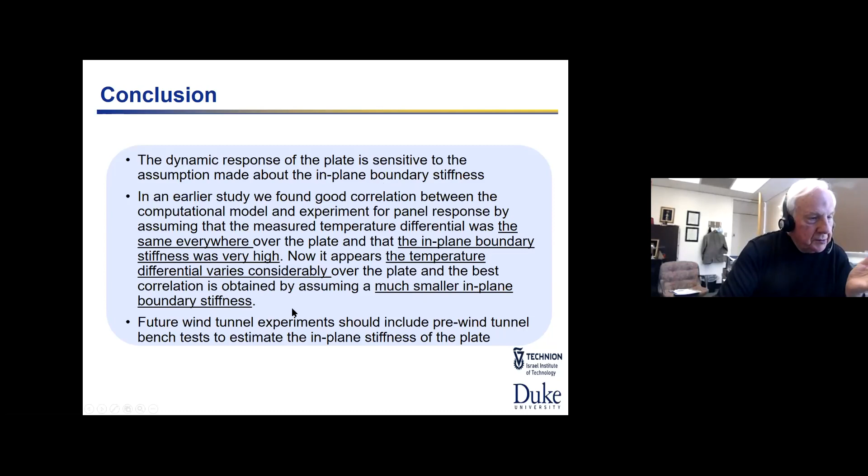And in the other study, we found good correlation. But we think it was an offsetting, it was a bit lucky. It was an offsetting of two effects which tended to cancel out each other. And now we still get good correlation, but now our physical understanding of why that is so has changed.

All right, let me stop about here with some overall conclusions and then invite questions.

These conclusions are somewhat philosophical, and various people have said things like this in the past. The best theory is the simplest one that adequately describes a physical phenomena. Of course, it's a search, right? It can be a long search, a long journey to find the model which is as simple as possible, but still adequately describes the physical phenomena.

All theories are approximations to reality, but so are experiments. There's the old joke about no one believes the theory except the person who did the computation. Well, everyone believes the experiment except the one who did the experiment. And experiments have their limitations too, at least our experiments do. I think we always need to be conscious of that.

So theory is not just validating the experiment, they can help you design the experiment and tell you something interesting about what measurements need to be made, and what measurements need to be made out of the wind tunnel before you put objects in the wind tunnel, let alone in flight.

And then the other thing I would emphasize, and that's implicit in what you've seen, all those models that were vibrating in limit cycles in our wind tunnel, at least, have never failed structurally. Of course, we designed them that way, but the point is you can.